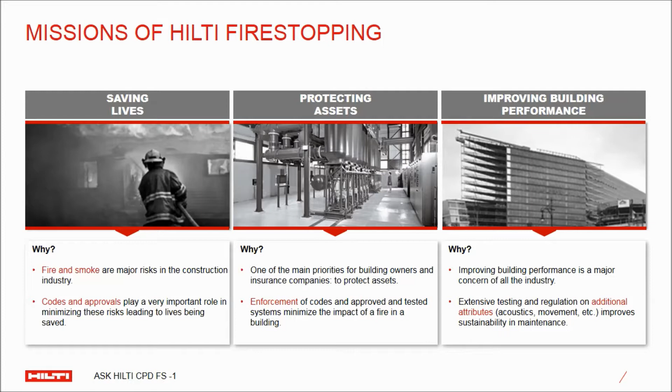There are 4 levels of measures to ensure fire safety in buildings: prevention, detection, active suppression system, and passive fire protection. Fire compartmentation is the universal golden rule for architectural design to contain fire hazards within. Fire stopping at joints and penetrations could not be overlooked, as it helps reinstate the fire resistance of fire barriers.

Fire spreads by heating up material to their burning points. Heat transfer could be achieved by convection, radiation, and conduction. It is crucial to require the insulation and integrity of a fire barrier to prevent burning of combustible materials in adjacent rooms.

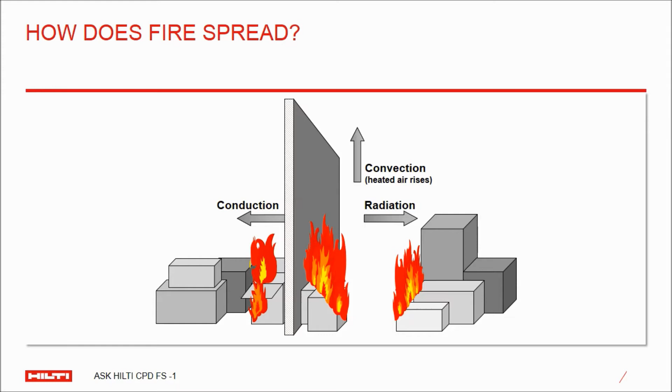When fire happens in one compartment, hot air builds up pressure, and smoke spreads to adjacent rooms through gaps and penetrations. As pointed out by the NFPA Fire Analysis and Research, 3/4 of all fire deaths are caused by smoke inhalation. Visual distance is less than 12 feet during fire. Smoke travels fast in a fire scene, and it was estimated that smoke travels 120 to 420 feet per minute under fire conditions.

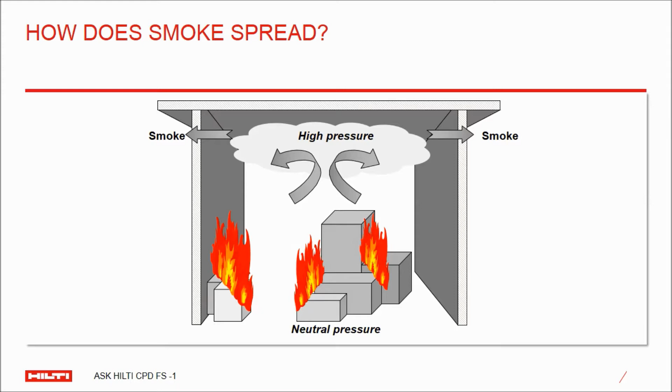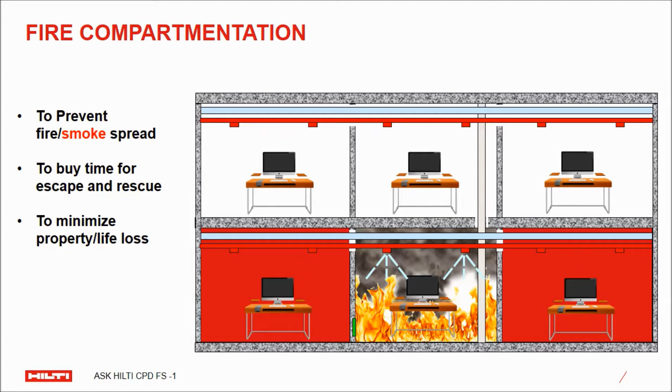Fire compartments are enclosed by fire-rated walls and floors. Building services are inevitably penetrated through fire barriers, creating weak points. Therefore, fire stopping is crucial to prevent fire and smoke spread along the building services. The video on this slide shows proper fire stopping is a must for building fire safety.

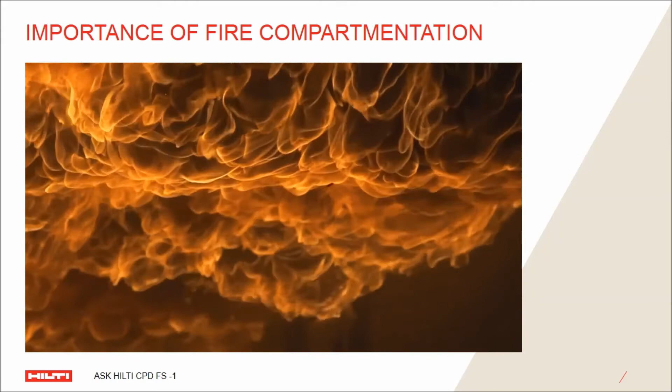Typically, 5 minutes is all you get. Fire, and especially smoke, spreads through a building much faster than most people think. Every year, about 3.8 million fires occur worldwide, while damage to assets is in the billions, and the yearly death toll amounts to 45,000 persons.

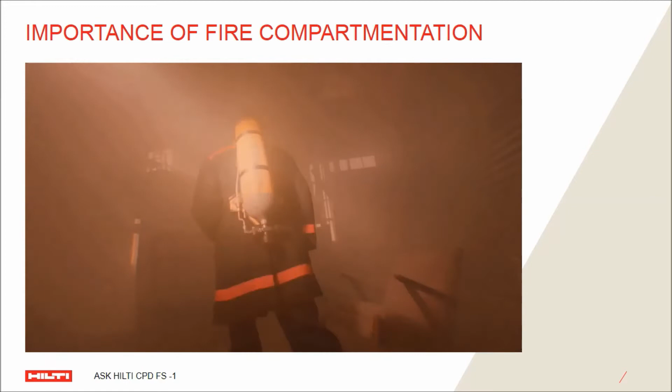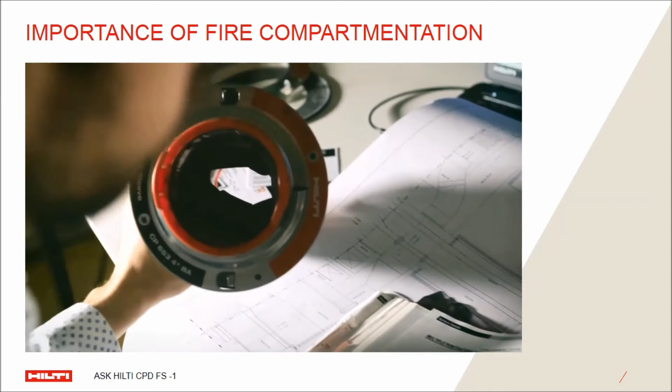Much of this could have been prevented if correctly installed fire protection had been in place. Architects, planners, engineers, and building owners are responsible for effective fire protection. Oftentimes, they do not realize that fire stopping is not an option. It's a clear legal requirement, and negligence or improper execution is a violation of the law.

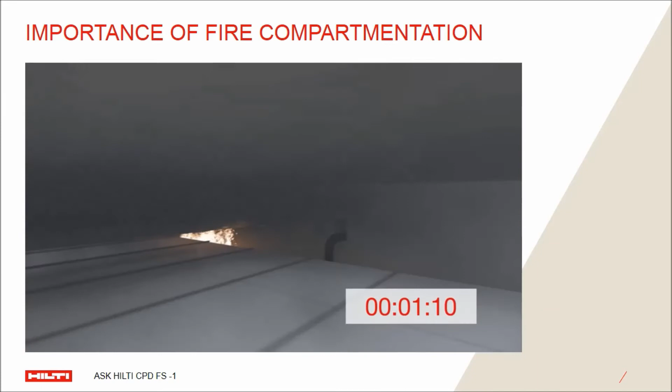Nearly 60% of fire deaths are not in the room of the fire's origin, and 3/4 of all fire deaths are caused by smoke. When there are through-penetrations in walls and floors, toxic smoke easily spreads to adjacent rooms.

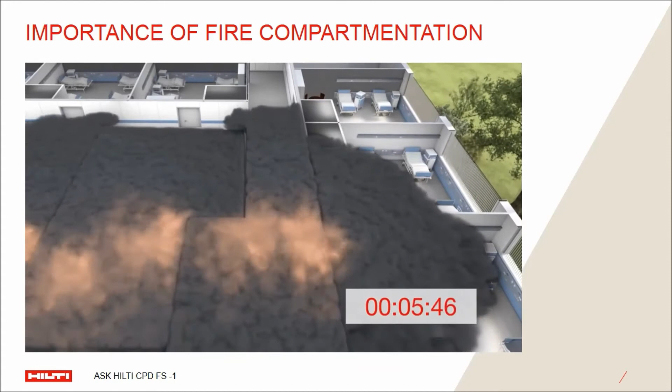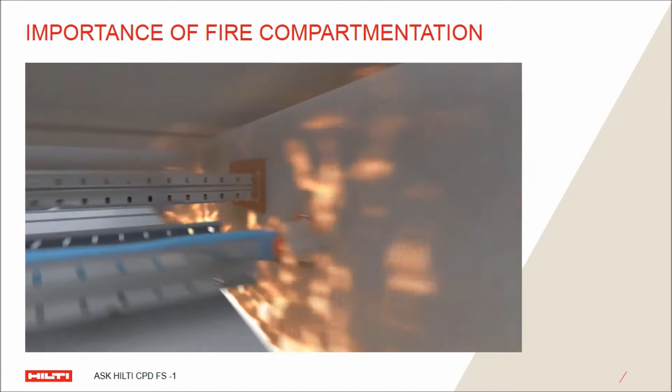The keys to effective fire protection are both active protection, such as detectors and sprinklers, and passive protection. Passive means that penetrations in walls and floors have been sealed with approved fire stop products. This principle is called compartmentation. When installed correctly, fire and smoke won't be able to spread from one compartment to another, allowing for safe evacuation of people and protecting valuable assets.

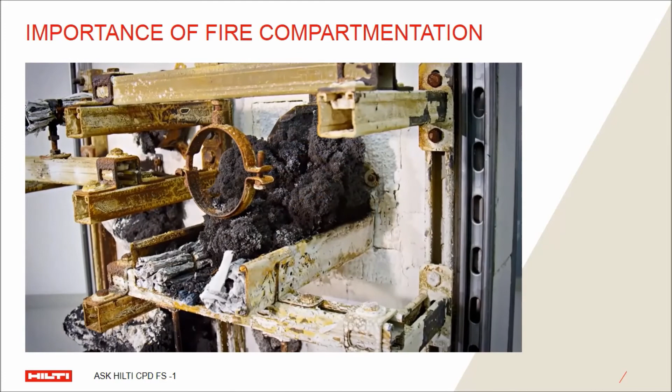The thing about compartmentation and fire protection is it's only as good as the products you use. One always thinks that accidents only happen to other people, but that's a false conclusion. It is the responsibility of architects, planners, engineers, and building owners to protect lives and assets by effective and well-designed compartmentation. Hilti offers innovative, legally compliant, internationally approved solutions. We recommend Hilti to be on the safe side.

Given the importance of proper fire stopping, it is essential to understand the technical principles of fire-resistant tests, which reflect the application approach for fire stopping design. Two fire stopping categories will be covered: linear joint and penetration.

According to Clause 5.2 in the 1996 FRC Code, compartmentation walls, compartmentation floors, separations, and lobbies should be constructed such that all joints are completely filled with non-combustible materials to prevent the passage of smoke or flame. In comparison, the FS Code 2011 Clause C3.2 states a fire compartmentation should be enclosed by fire barriers. Protections of all openings, joints, and penetrations located in a fire barrier should have an FRR not less than that of the fire barrier. There is a clear upgrade requirement to use FRR systems to seal all openings and joints in a fire barrier, instead of just non-combustible materials.

One example of non-combustible materials could be cement sand, which was used to completely fill up the joints. However, this may not be a proper FR method, as it has not been fire tested.

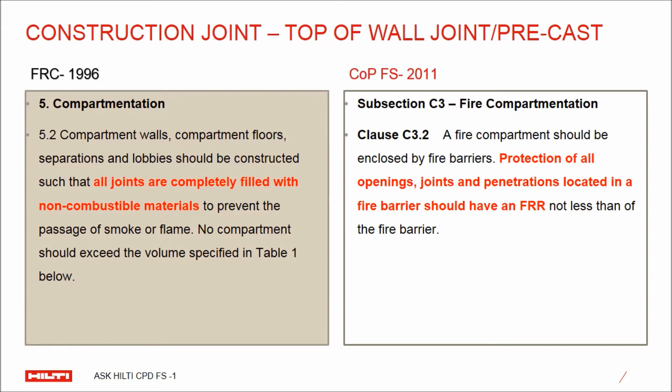Fire resistance rating (FRR) means the period of time that a building element is capable of resisting the action of fire when tested in accordance with the ISO heating curve.

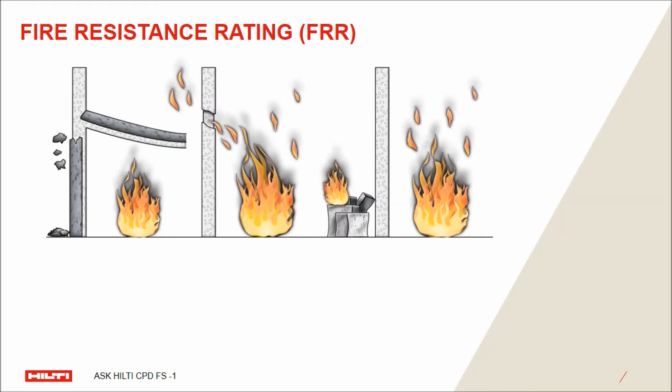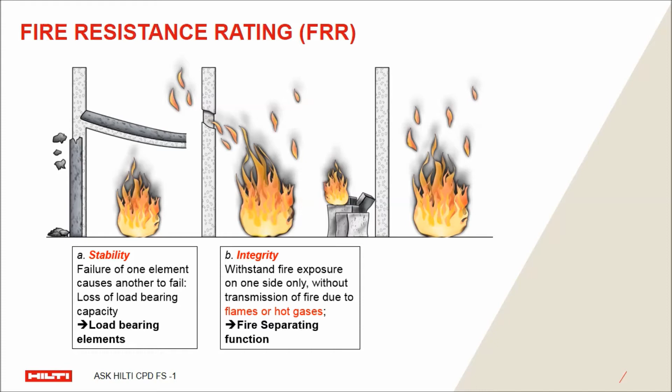Fire resistance ratings are designated by three terms. Stability: the structural element loses its load-bearing capacity due to fire, and its failure usually causes another structural element to fail. Integrity: the ability to withstand fire exposure on one side without transmission of fire due to flame or hot gases. Insulation: prevents heat transfer from one side to another.

The three terms stability, integrity, and insulation are not required for all kinds of construction elements. For example, floors require stability, integrity, and insulation, whereas non-load-bearing walls require integrity and insulation. Fire stopping usually requires integrity and insulation and shall be exposed at both sides of the fire barrier.

Joint fire stopping starts by filling mineral wool in the gaps. This provides a necessary thermal break between the fire side and non-fire side. After the mineral wool is installed, the fire sealant is spread or applied to cover the mineral wool, overlapping onto the floor or wall material.

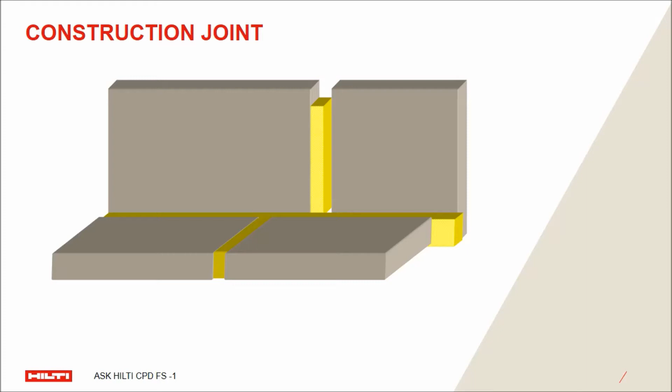The sealant holds the whole system together, attaching the mineral wool onto the substrate. The sealant also plays an important role in stopping hot smoke and toxic gases from passing from the fire side to the non-fire side.

This slide explains the difference in performance between non-compliant products and tested fire stop systems when subjected to the cyclic portion of the ASTM E1966 testing standard.

First, you will see the non-compliant video, which shows drywall mud installed in a joint and exposed to minimum movement. This video will show that the drywall mud cracks and pulls away from the substrate, allowing smoke and toxic gases to pass through the assembly.

In the second video, you will see the dramatic difference in performance when using a proper fire stop system under extreme movement conditions—1/4 to 1/2 inch deflection in the floor at the midpoint. If that joint is sealed with a static joint system instead of a dynamic joint system, the rigid joint materials used are likely to crack, crumble, or fall out over time, which would open the joint and allow movement of fire and smoke. Unless information is available to confirm that a joint is truly static, meaning zero deflection, it is best to use a dynamic joint system.

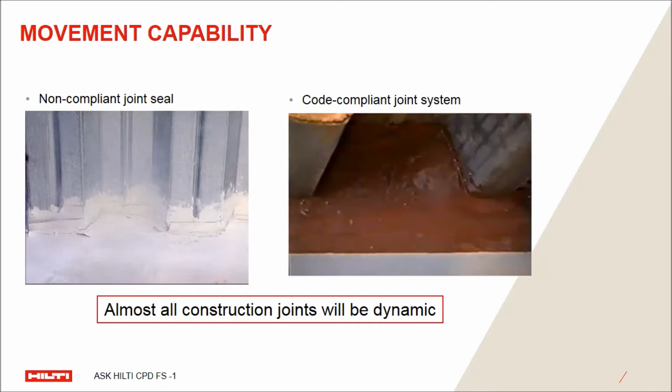It is administered to 500 cycles. This particular test shows, similar to our UL listing, the 50% compression and extension. You can note how well the material is adhering to the underside of the metal deck and the gypsum.

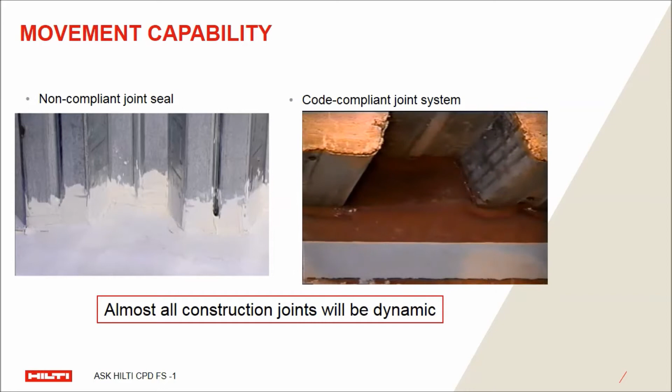This slide shows the different fire stopping solutions for combustible and non-combustible penetrations. For non-combustible penetration, like metal pipe, mineral wool is used to fill the gaps and serve the insulation purpose. Fire stopping sealants will be applied on top to suppress smoke leakage. For combustible penetration, intumescent material is needed to fill the opening formed by the collapse of the melting pipe.

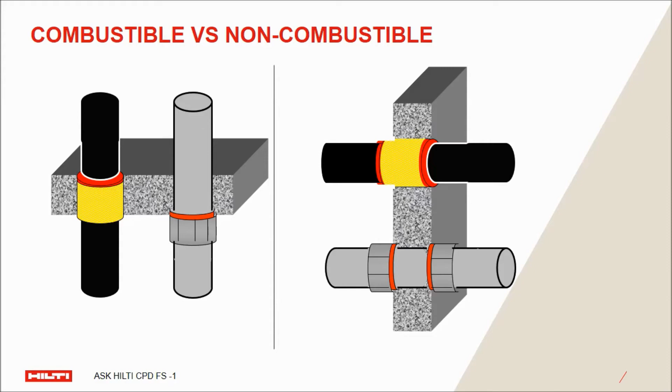Walls are fire stopped at both sides because fire could be located on either side of the wall, thus the fire stopping is usually symmetrical. Floors are fire stopped at the underside of the slab since hot air brings fire upward.

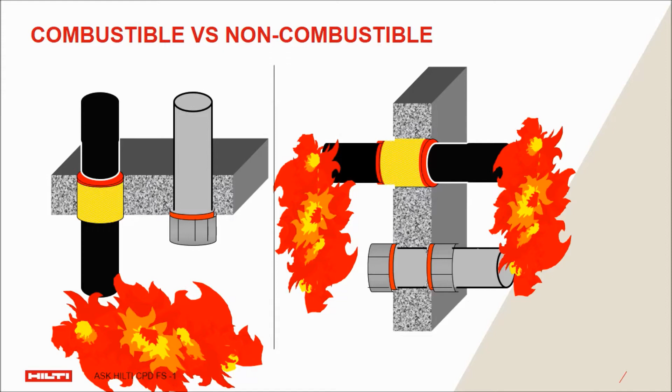An example of how intumescent fire stopping works: note the intumescent inlay within the collar. The collar is necessary because it must direct the intumescent expansion inward to close the melting pipe. If the collar was not there, the intumescent expansion would take the path of least resistance, going straight out into open space, accomplishing nothing.

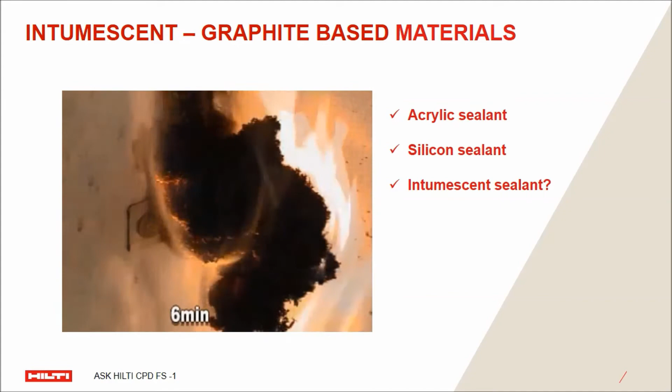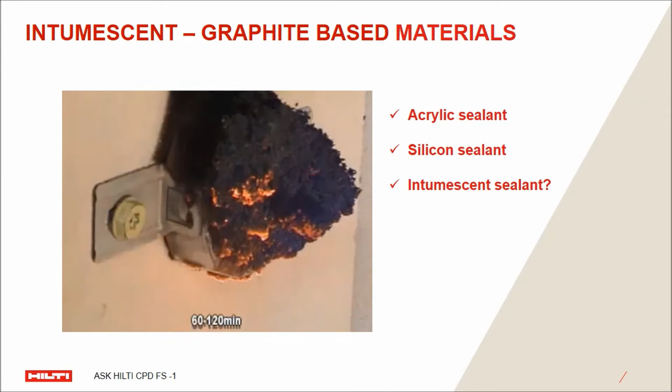When designing an effective fire stopping system, we have to consider the characteristics of the base materials, such as the composition of the materials, the thickness of the base, the opening size, and the FR rating requirement.

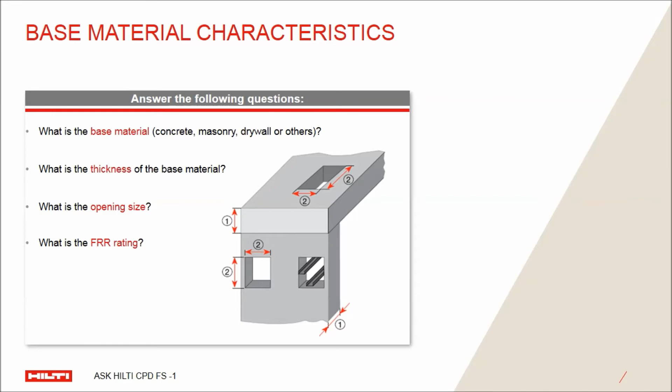Similarly, for the penetration, we also have to consider their characteristics. Cable tray, insulated pipe, and mixed penetration may have variable fire stopping solutions.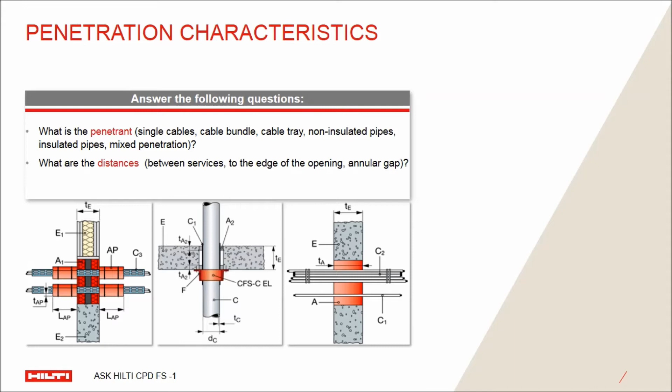The video here shows how a fire stopping system is assessed in a fire resistance test in accordance with BS 476 Part 20 or BS EN 1366.

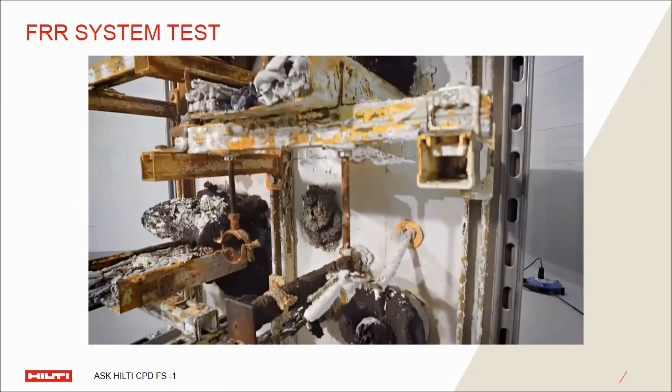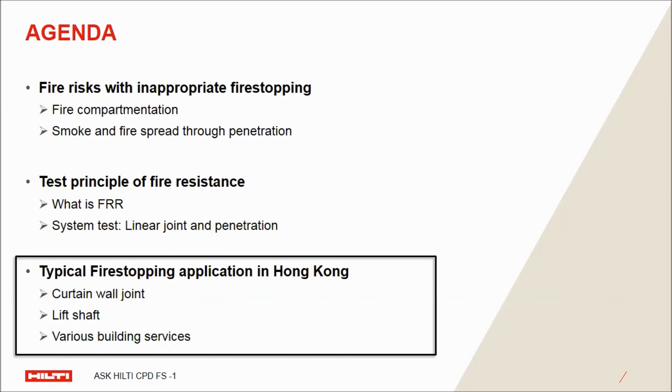There are some general fire stopping practices for each application. In this section, we will go through the typical applications in Hong Kong and their associated code compliance solutions, in Clause C 10.2.

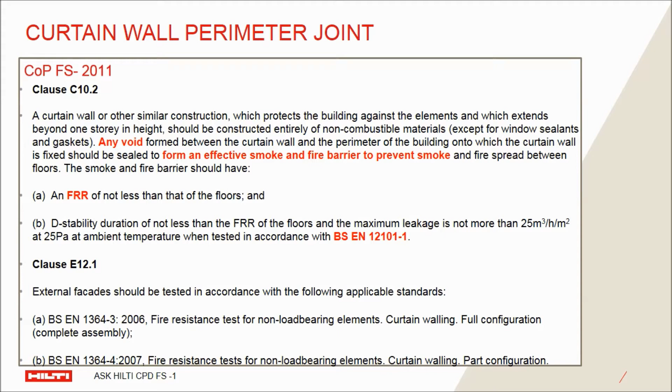Any voids formed between the curtain wall and the perimeters of the building onto which the curtain wall is fixed should be sealed to form an effective smoke and fire barrier to prevent smoke and fire spread between floors, with an FRR of not less than that of the floors. The FRR may follow the test standard suggested in Clause E 12.1, BSEN 1364 Part 4, Fire Resistance Test for Non-Load-Bearing Elements, Curtain Walling. Smoke leakage test should follow BSEN 12101 Part 1.

Traditionally, mineral wool was installed in the gap between slab and curtain wall back panel, with a steel plate attached on top. Under fire, the aluminum framework may buckle, resulting in the creation of a smoke leakage path due to the enlarged gap width. The mineral wool may fall off during fire when it was loose packed or without compression.

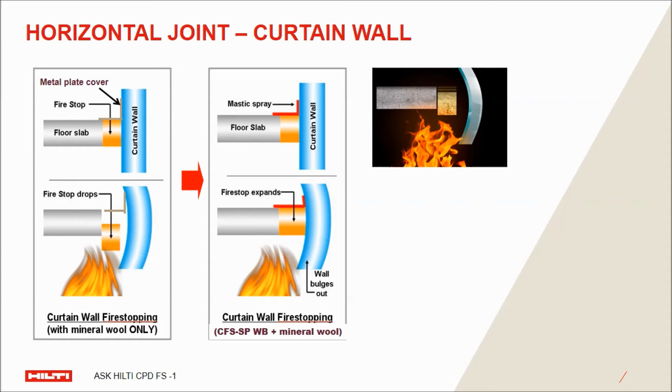To form an effective smoke and fire barrier, the fire-stopping system shall provide movement capacity, not only for the cold movement due to wind load, but also for the hot movement under fire. The mineral wool shall be compressed by 25% and fit into the perimeter joints. On top, the joint spray shall form an effective fire smoke barrier. Stick the mineral wool on top and overlap with the concrete edge. The joint spray usually has a movement capacity of 50%.

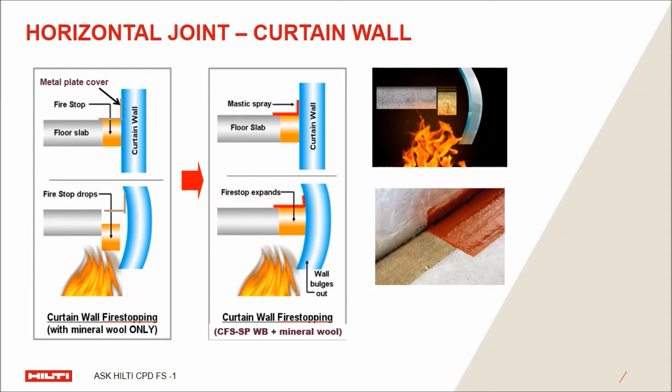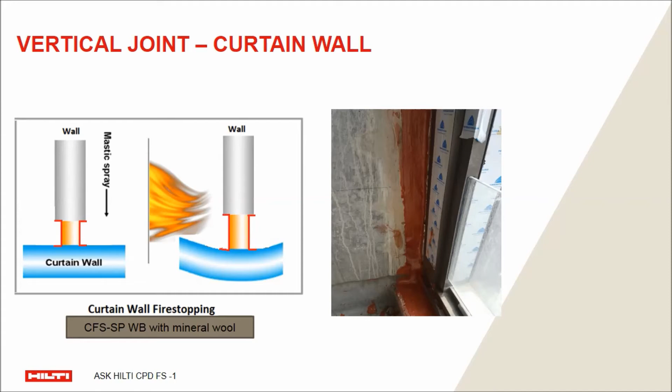Besides the horizontal joints, the vertical joints between the fire-rated wall and mullion may also be of concern to prevent smoke passing through. Mineral wool of approved density and thickness is placed in the middle of the gap, and joint spray is applied at both sides of the mineral wool. This slide shows the installation method of the joint spray system.

Mineral wool of density 60 kg per cubic meter is compressed by 25% and friction fit into gaps. Joint spray CFS-SP WB is brushed on top of the mineral wool with a wet film thickness of 3 mm. The joint spray shall at least overlap with both edges of the substrate by 15 mm. The acrylic joint spray may take half a day to be tack-free. For applications in high humidity conditions, silicone-based joint spray is highly recommended.

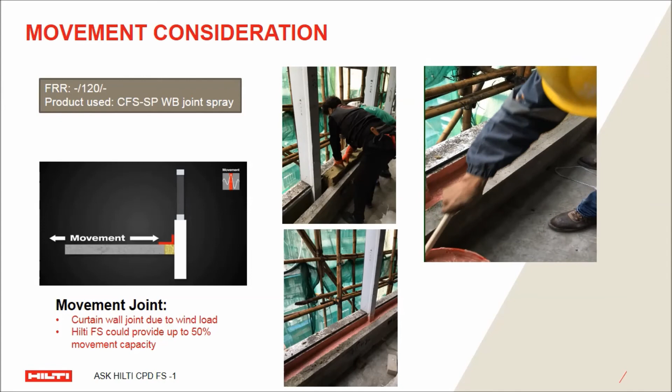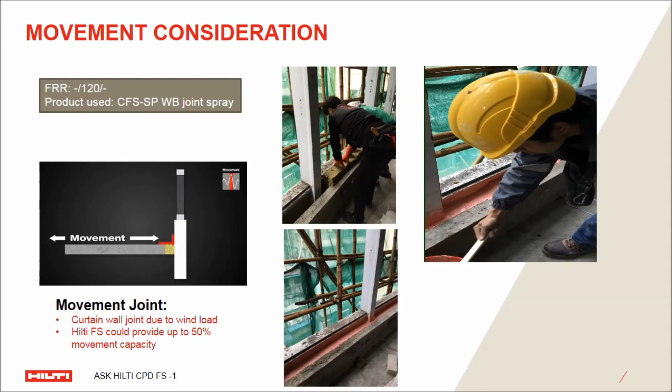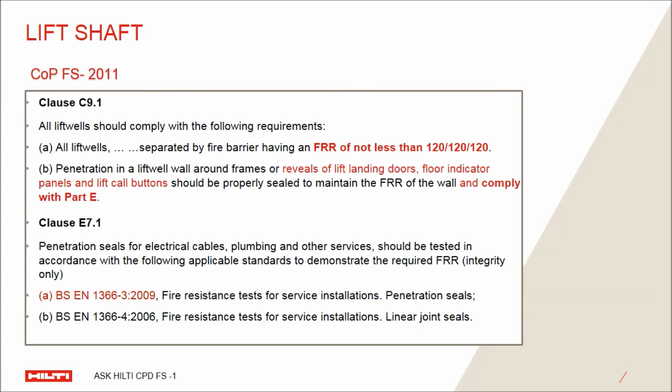It is well known that the lift shaft is a vertical shaft enclosed by fire barriers. While it may be easily overlooked, the openings in the lift shaft should be properly sealed up with an FR system. In accordance with Clause C 9.1, penetrations in a liftwell wall around the frames or reveals of lift landing doors, floor indicator panels, and lift call buttons should be properly sealed to maintain the FRR of the wall and comply with Part E, which means the FRR shall be tested according to BS or EN standards.

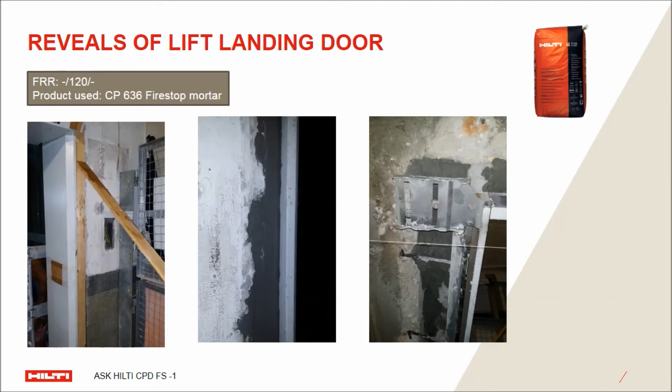Fire stop mortar is used to fill the gaps between concrete edge and steel frame, with the wooden framework as the supporting structure. For the control panel and call button, fire stop mortar could be applied if the remaining depth is larger than 100 mm in order to achieve FRR of 2 hours.

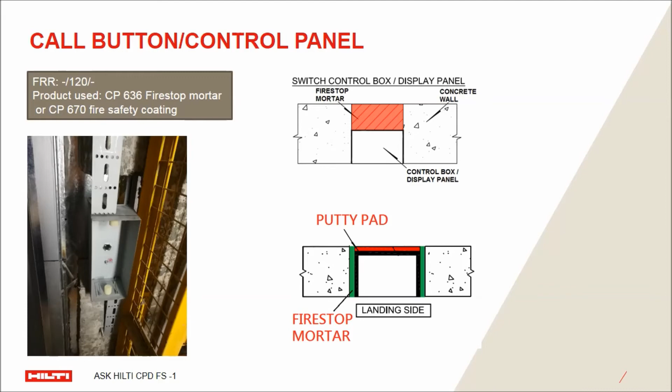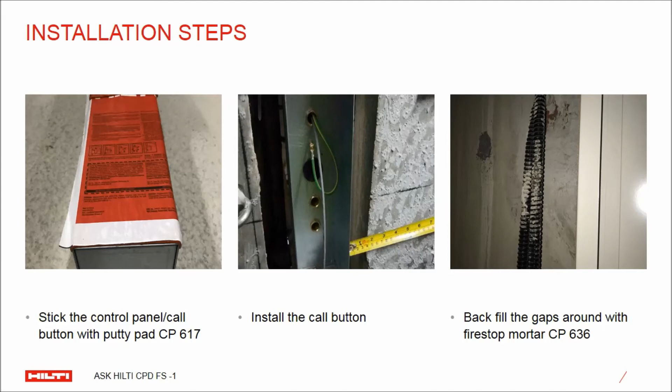For some thin wall cases where the lift shaft wall thickness is less than 150 mm, putty pad is an ideal solution to replace the fire stop mortar, since it is only a 3 mm thick intumescent sheet. It is recommended to stick it on the back of the control box. The leftmost picture shows the control panel with putty pad at the back. Fire stop mortar could be used to fill up the gaps or plaster at the back of the control panel.

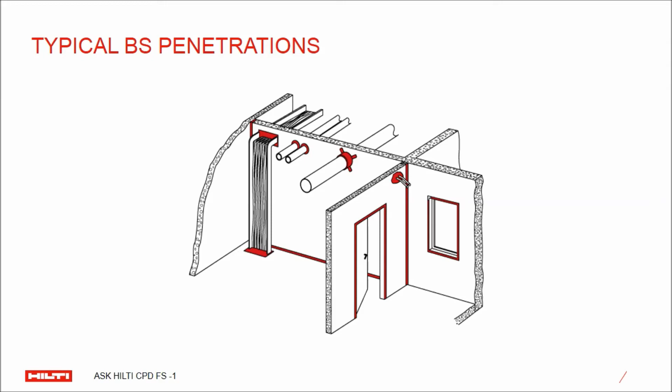We are going to give you an overview on how to select fire stop solutions for typical building services. The correct selection depends on FR rating, base materials, opening size, penetration type, and so on. It is highly recommended to specify the fire stopping type for a particular building service, so that it will save a lot of submission and approval work during the construction stage.

In Clause C 8.2, every opening for passage of air conditioning ducts, ventilation ducts, electrical trunkings, conduits, pipes, cables, and the like through a fire barrier shall be protected with a fire damper or other forms of fire stop to maintain the required FRR of that fire barrier. And in Clause C 8.5, any fire sealing system shall comply with requirements in Part E, which means each fire stopping system shall be tested according to BS or EN standards.

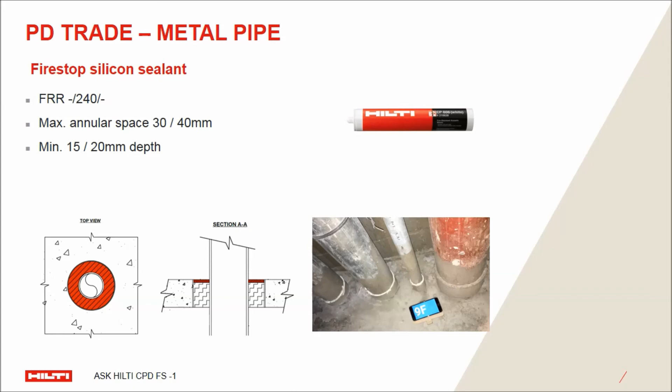For metal pipes in plumbing and fire service trades, silicone fire stop sealant is usually applied on top of mineral wool. Special attention shall be paid to the gap width and movement capacity if required. Silicone sealant is recommended due to its good weatherproof property and low shrinkage ratio.

Plastic pipes have a melting point around 200 to 300 degrees Celsius, and they will melt and collapse in the first few minutes of a fire test. The fire stop system employed should be intumescent, so that the expansion of graphite-based materials could react upon fire fast enough to close up the holes of the melting plastic pipe.

Fire stop collars are commonly surface mounted. For the wall case, collars should be installed at both sides of the wall. For the floor case, collars should be installed at the underside of the slab.

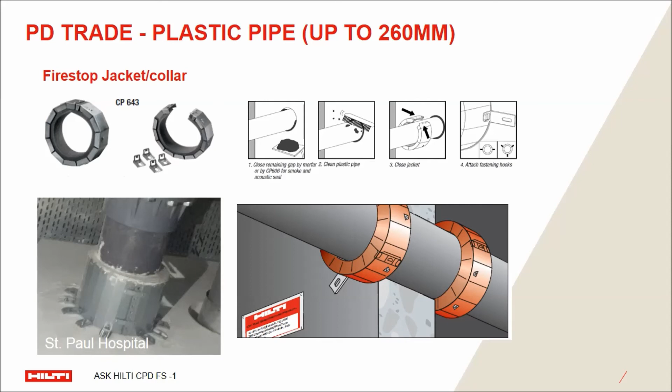If space is limited among pipes, intumescent wrap could be considered, as it would flush with the wall surface. One drawback about the wrap is the difficulty of inspection and record.

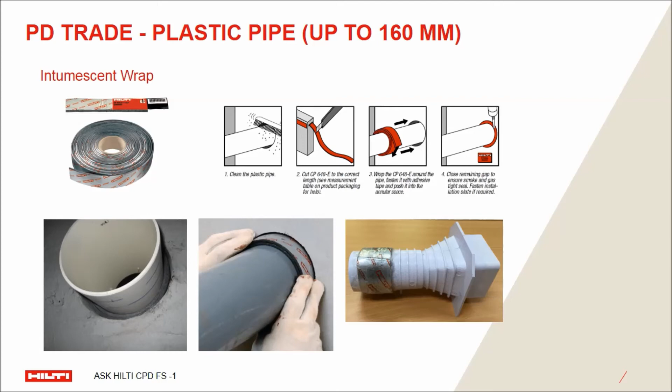For some inclined and elbow pipes, endless collar is extremely helpful, as it only needs to wrap up three quarters of the pipe perimeter instead of a full pipe wrapping, as shown in the picture of the pipe elbow in the middle.

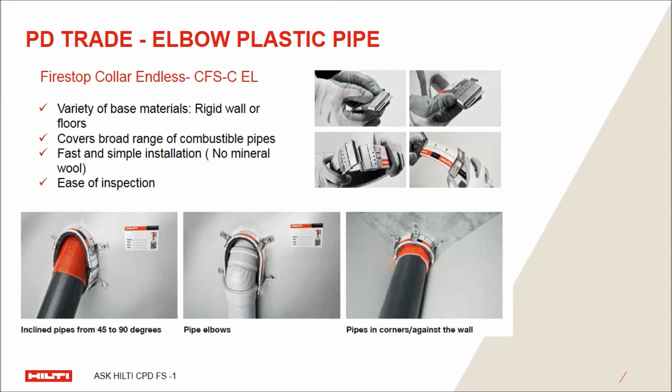For insulation pipes, for example refrigerant pipes, condensation pipes, and hot or cold water pipes, intumescent bandage should be used, as the insulation layers could behave as plastic materials. You may use bandage to wrap up individual pipes and put all the pipes into one metal sleeve. This method offers the advantage of space saving compared with the traditional method where you need to provide an individual metal sleeve for each pipe.

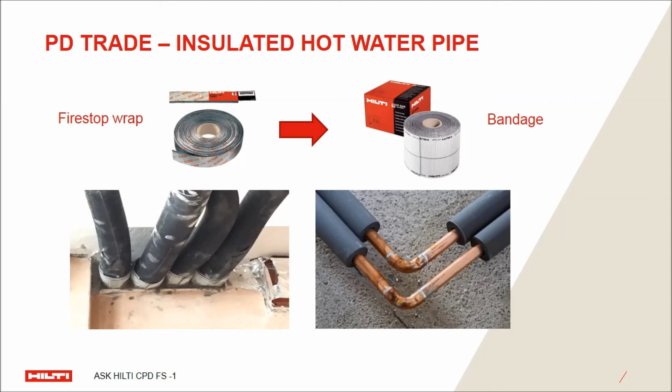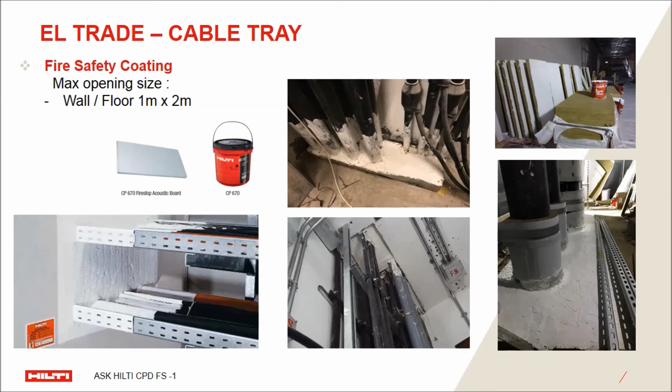Fire safety coating is good for medium to large openings, especially with cable tray, chiller water pipes, and multiple penetrations. The fire safety coating CP670 is applied at both sides of mineral wool with a density of 160 kg per cubic meter. In general, for floor penetration you need 100 mm thick mineral wool, and for wall penetration, 50 mm thick mineral wool is good for an FR 2-hour integrity rating.

Please be noted that mineral wool alone is tested against BS 476 Part 4 non-combustibility material test, and this is not the fire resistance test Part 20. You should not simply apply mineral wool as an FR system without referring to any fire resistance test details and configuration.

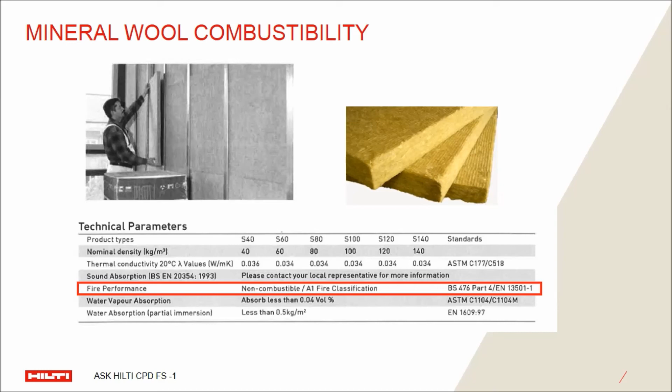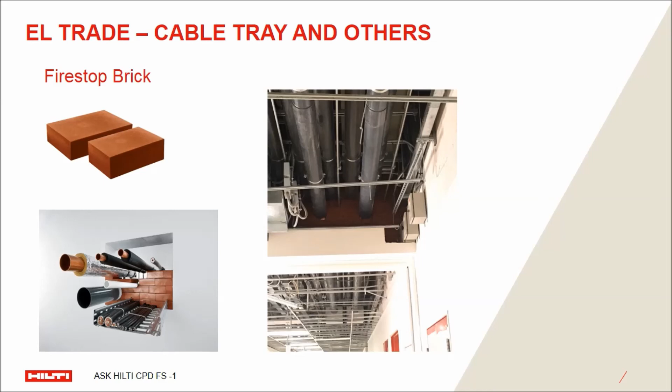For some congested piping areas, fire stop brick is recommended. Fire stop brick is also an intumescent material and is soft and flexible. You may easily cut and fit it to the confined area. For the gap around penetration, fire stop foam CFS FFX foam could be used to seal up the gaps.

When trunking passes through a fire barrier, the openings formed inside and outside the trunking should be properly sealed up with an FRR system, as data cable bundles easily spread fire and smoke. For trunking where frequent repenetration is required, fire stop brick offers an easy reinstallation and tidy solution.

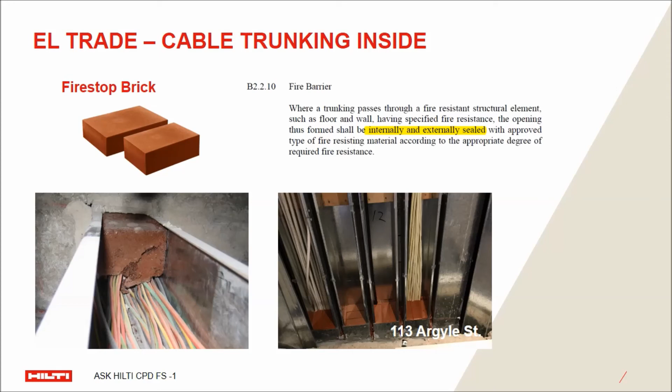The cutting-edge fire stop solution for data cable would be speed sleeve, which is superior for data center and hospital projects since the airtightness requirement is stringent. You just need to twist to open and close the speed sleeve for cable repenetration.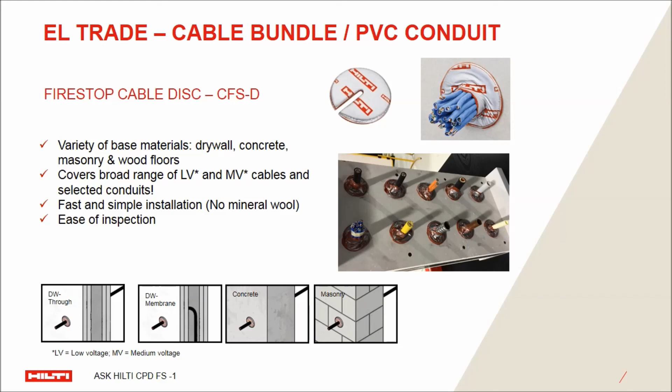Looking for the most convenient solution for small-sized plastic conduits and cables? You may use a cable disc. You could simply stick a disc around the penetration. It is a perfect solution for retrofit projects.

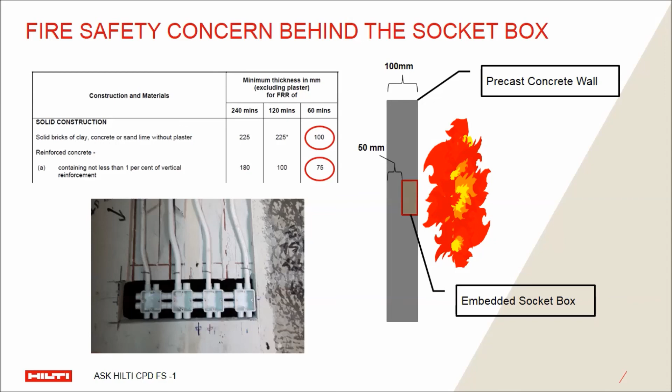The socket box embedded in a thin fire barrier would be a potential risk if no fire protection is provided. The situation could get worse if a group of socket boxes occupy a big opening. In the code of practice, a concrete wall of 75 mm and 100 mm could resist fire for 1 hour and 2 hours respectively. Embedment of socket boxes may result in the reduction of the fire resistance rating of the wall.

Putty pad offers the solution for socket boxes embedded in a fire barrier, whether it is a drywall, block wall, or concrete wall. The putty pad not only offers fire protection, but also provides acoustic insulation for back-to-back socket box installation.

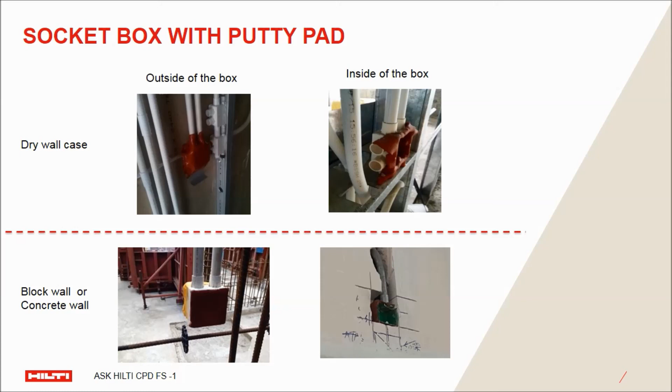We recommend the most popular code compliance method. You are most welcome to reach our engineer for detailed drawing and test report submission.